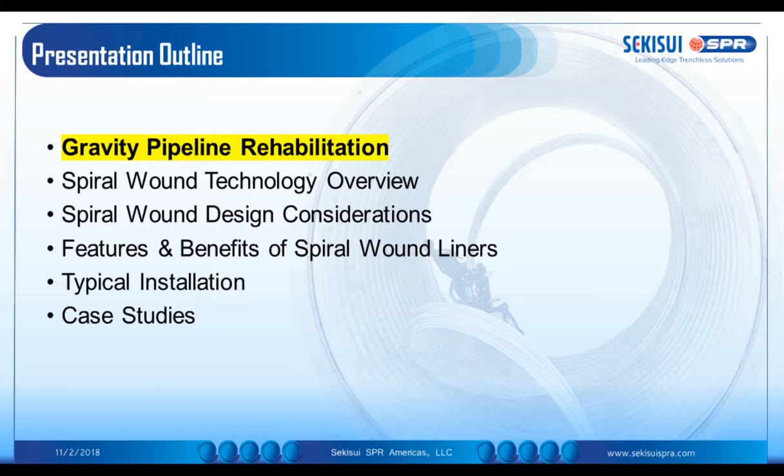As you know, we have a couple of trenchless technologies available in the market. CIPP is probably one of them that you all heard about. We have pipe bursting, slip lining, spray-on lining like the epoxies and geopolymers. Today's presentation is really about spiral wound liners only. And I'm handing over to Sean now.

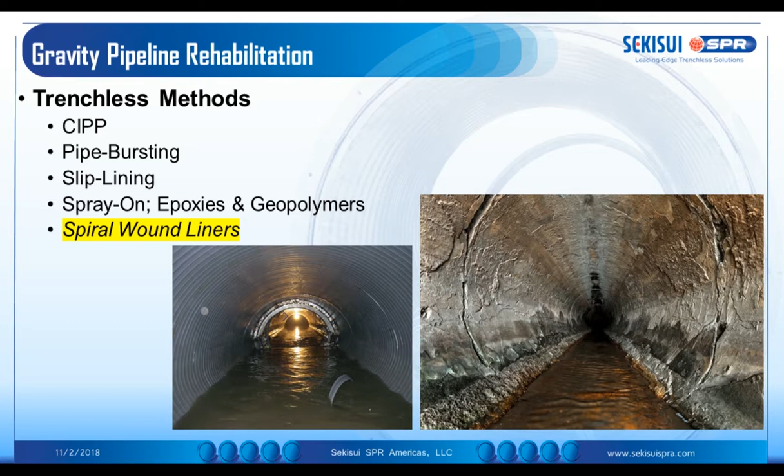Good afternoon, everybody. We're going to be focusing primarily on machine wound spiral wound liners. There are other techniques hand applied, but again, for this presentation, we're primarily going to focus on the machine wound liners. So we're going to talk about the history of spiral wound liners, a brief process description of the various options, describing the PVC materials and the installation methods.

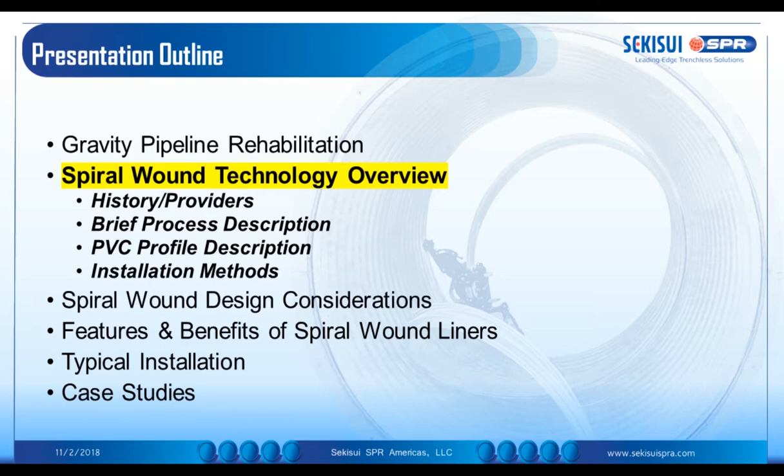Following that, we're going to talk about design considerations, features and benefits, typical installation, and then we'll hand back to Klaus to talk about some of the case studies. So a brief history of spiral wound liners.

There's approximately 30 years of installation history. The technology originated primarily out of Australia and then Japan in the 1980s. We first introduced the technology into the United States in 1996, and around the world we've got approximately 20 million feet installed and 3 million feet installed within the US.

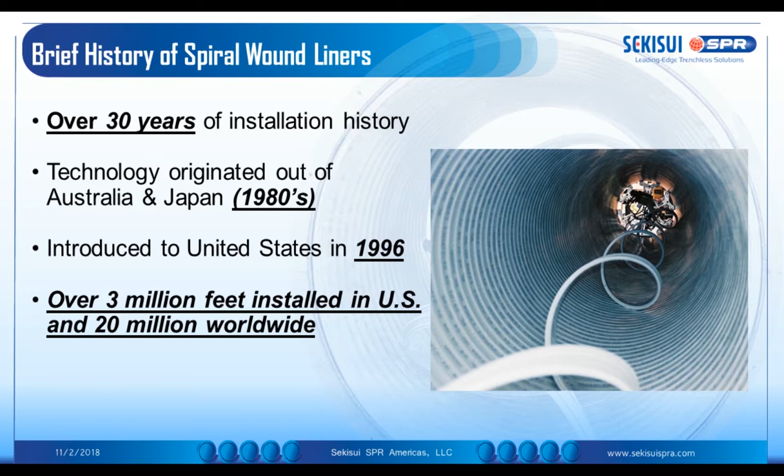Spiral wound providers, obviously we have Sekisui SPR Americas. Within the US we have Contech Engineered Solutions for the PE liner product. There are other spiral wound technology providers such as Danby Pipe Renovation and SWP.

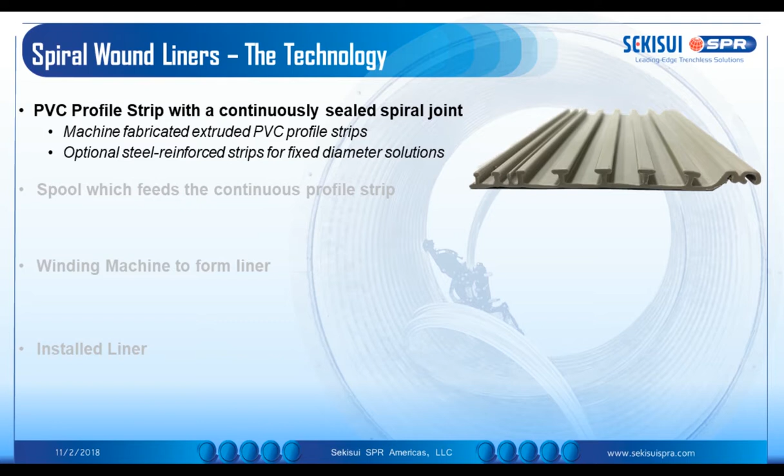Now, on spiral wound liners, the technology involves a PVC or an HDPE profile strip with a continuously sealed spiral joint. It is extruded in a factory environment and then shipped to site, and some of the technologies have optional steel reinforcing strips for fixed diameter and some close fit solutions where additional structural strength is required.

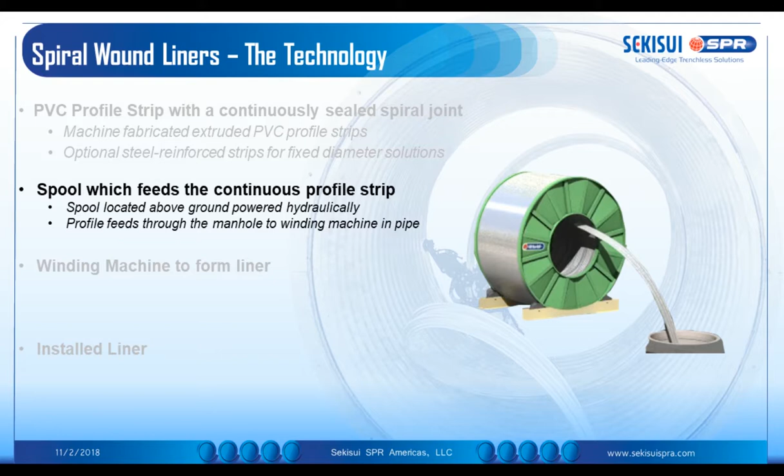In the factory, we extrude the profile and we spool it onto large drums, which are then transported to site. The spools are located above ground and they're powered on driven skates, hydraulically driven, and the profile comes from these spools with the different technologies and is fed through manholes to the machinery which is installed in place.

The winding machines that we're going to talk about primarily today, we have 3 different machines. We have an SPR EX machine. The range of that is typically between 6-inch and at the upper end 42 inches. We have an SPR TF machine, which is a machine that traverses the pipeline and lays a liner behind it.

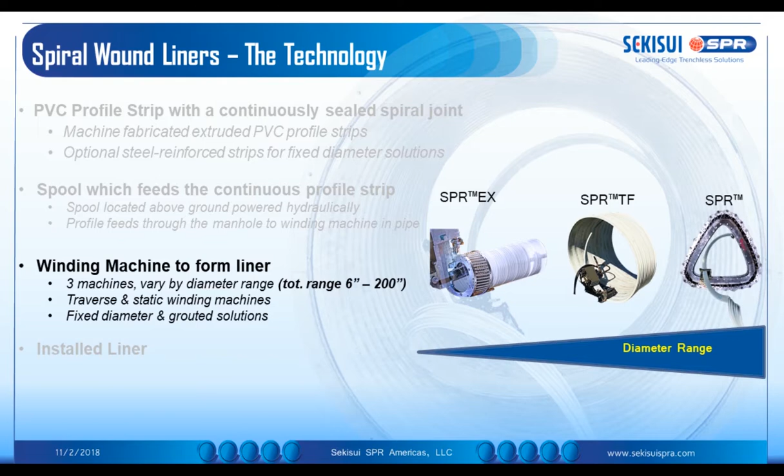The installed liner is a hydraulically sealed, fully structural pipe. The smooth inner surface of a plastic liner provides improved hydraulic capacity. The loss in cross-section is typically countered by that improved flow capacity characteristic, and we typically design for a 50-year design life.

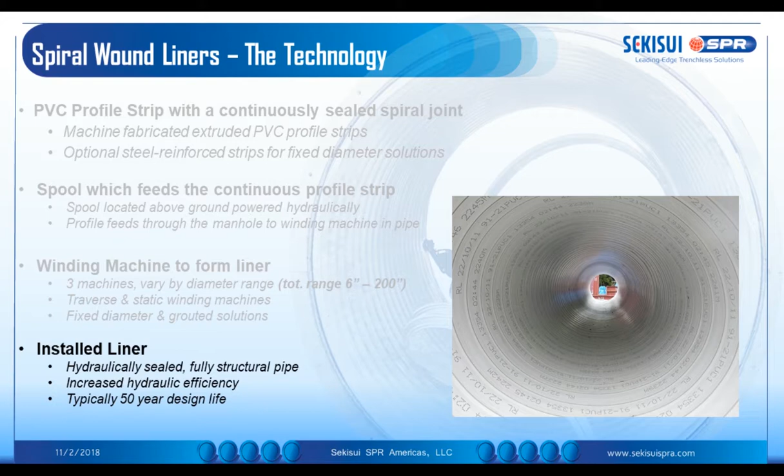Now, the PVC profile. It's a UPVC material. It meets the minimum cell classification requirements within ASTM F1697. There are a few different profiles which are covered by that particular standard, depending on the particular application. The PVC profiles are sealed via a mechanical lock.

Now, the sealant materials are primarily factory applied, and the QA for such a PVC profile is really done in the factory, and the benefit of this is that it's a mechanical installation process. There's no thermal processes and so on going on site.

The PVC profile does vary with the installation method. The particular profile that's shown on this particular slide is for the SPR TM method. And in any case, there are options with and without steel reinforcement. There are particular profiles that are designed for close fit, expandable applications.

There are also profiles designed to be laid in close contact with the host pipe as the machine traverses the line, and profiles designed to be installed at a fixed diameter, in which case the annular space between the liner and the host pipe is grouted.

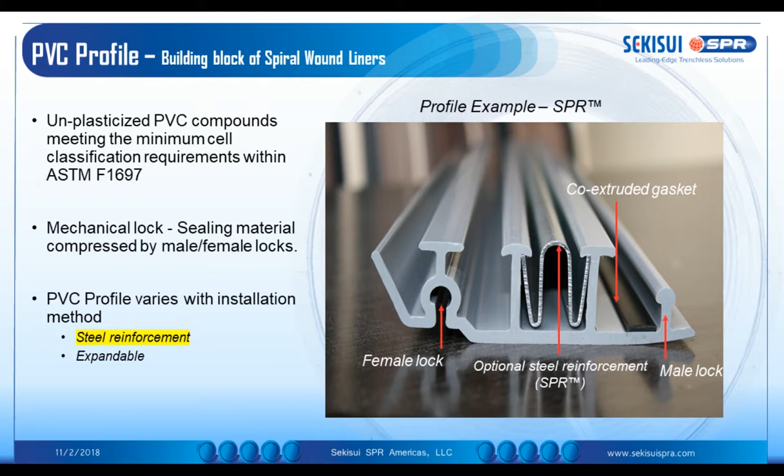The mechanical lock is in between each successive wrap of PVC profile. There's a sealing material that is factory applied. In the case of the SPR EX technology, there is lubricating sealant applied on site. At any rate, the liners are designed to prevent any infiltration. They have passed the requirements of various standard tests for pressure testing.

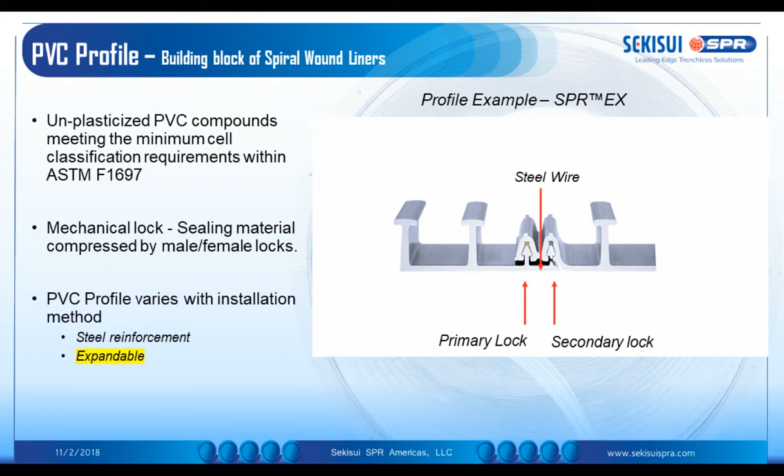This next example for the SPR TF profile, what we have here is one of the examples that is a PVC only profile. There is an option for SPR TF that does include steel reinforcement for a greater long-term stiffness. Once again, this particular material can be steel reinforced. It is an expandable product. It can be laid in close contact with a host pipe.

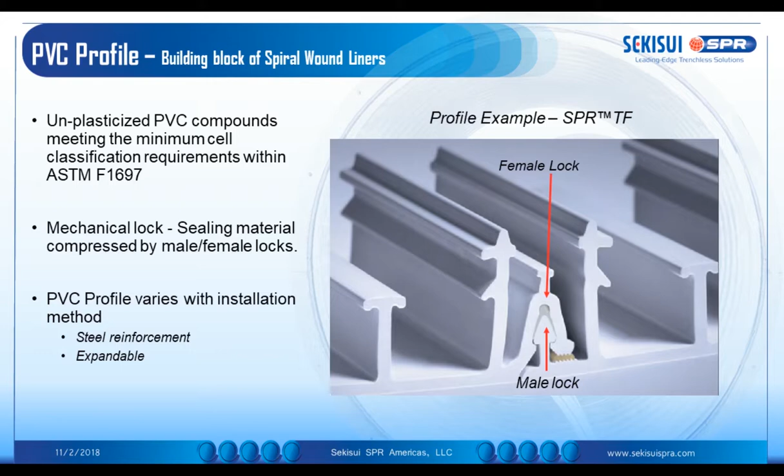Now, the difference between the different technologies, it was mentioned before that we have the option to place a machine in the base of a manhole and essentially push out a liner, so a fixed machine. In effect, this is more or less an advanced form of slip lining, in which way we are able to push out a liner and then, through a mechanical process, radially expand it to form a close-fit liner with the existing host pipe.

So the winding machine is placed at the entry point of the host pipe at the bottom of the manhole. We wind profile through the machine to push out a liner pipe in either direction, upstream or downstream.

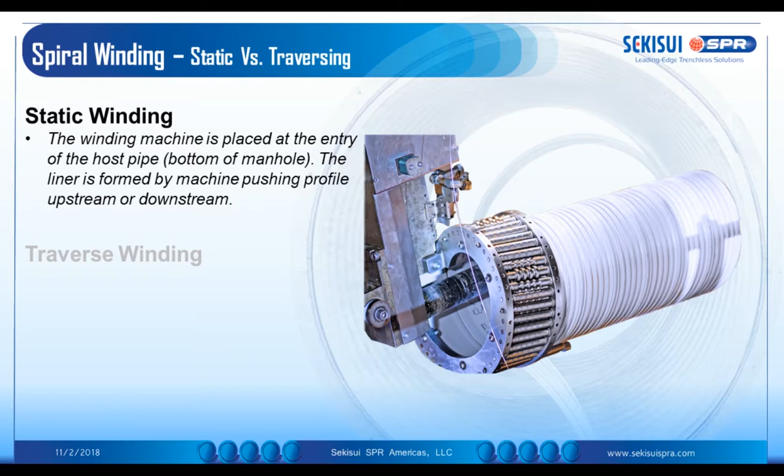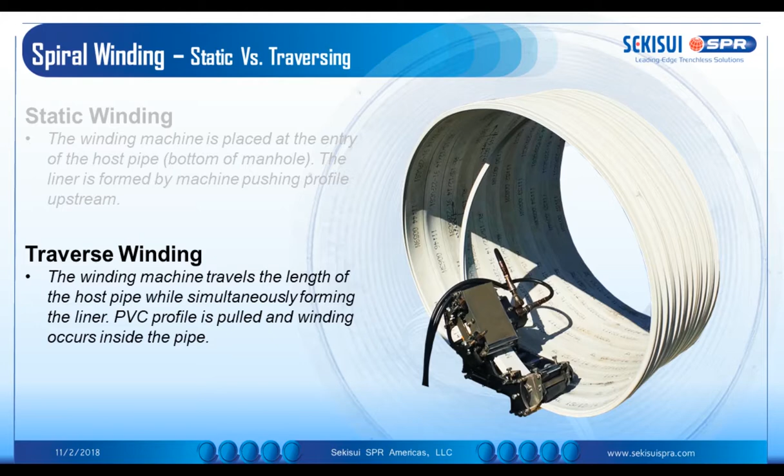The traverse winding method employs a machine that we place at the beginning of a line, and it forms a liner as the machine travels the length of the host pipe, simultaneously interlocking the profile to form the liner. The PVC profile is pulled and winding occurs within the pipe.